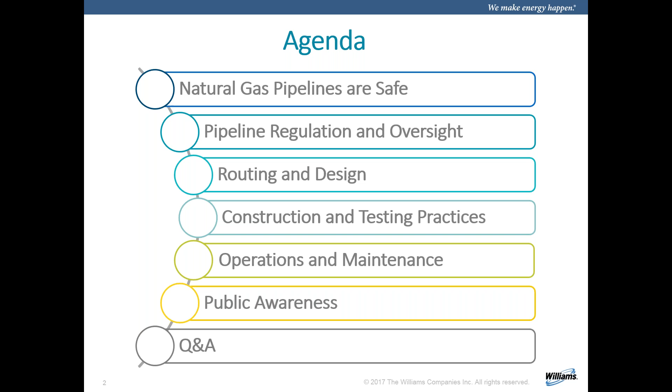Today, I'd like to step us through the entire cycle of gas pipeline management from a pipeline safety perspective. We'll highlight why we know pipelines are safe through some of the regulatory compliance aspects, and then the construction of a pipeline from the routing perspective all the way through the design and construction, and then testing of the pipe, and then as we operate and maintain our pipeline, really highlight the integrity management programs that we implement and execute in compliance with the regulations to ensure that our pipeline integrity program and transportation is safe. And then we'll highlight the public awareness and outreach programs that we as an industry are constantly mindful of and consider an important topic. And then we'll close with some questions and answers.

First of all, I'd like to start off with a statistic from the Interstate Natural Gas Association of America. Northwest Pipeline is a member.

I believe there's 18 members in INGAA. Northwest Pipeline, or Williams Gas Pipeline, is a member of INGAA. And this is a statistic that I thought was really interesting and worth sharing: 99.999997% of all gas moved through interstate pipelines is done safely.

So we should take a lot of confidence in that statistic, and it really shows the credibility and value of our pipeline safety programs. It is considered by INGAA, citing the Department of Transportation, the safest form of energy transportation in the United States.

We as operators of gas pipelines certainly consider safety our first and foremost priority. It is considered every step of the way, through our discussions and maintenance of our pipelines, and through that whole cycle of design and maintenance.

Here at Williams, I'll just highlight the first mission statement we have: we operate safely in everything that we do every day. I believe most employees have that posted on their office walls, so they can constantly be reminded that we need to operate safely in everything that we do.

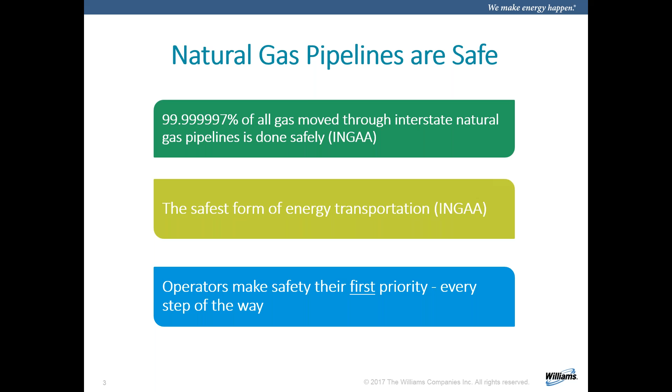Moving on, let's highlight why we believe natural gas pipelines are safe. There really isn't any one single tool or technique that provides all the answers. It's a multifaceted approach, all the way from robust design and construction through our operations and maintenance practices. We are constantly mindful of the need to be safe and constantly questioning the practices we employ.

We obviously want to make sure we meet or exceed all of our pipeline safety regulatory compliance expectations. We'll highlight a bit about what that is and how we get into the Department of Transportation rules. In many cases we do exceed those expectations, and we also try to develop a strong safety culture.

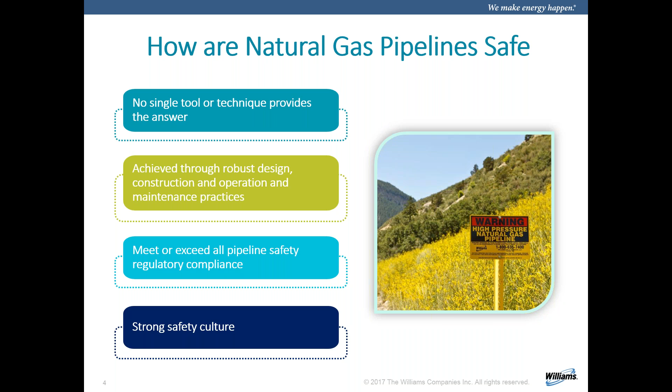Moving on, from a regulation standpoint, we are regulated as an interstate pipeline by the U.S. Department of Transportation through the Pipeline and Hazardous Materials Safety Administration. Northwest Pipeline is interstate, and in our portfolio of assets we also have some intrastate pipelines, which are generally regulated by the state entities themselves.

So that puts in perspective who our regulators are—it could be a federal regulator or a state one, and each issues regulations we're all mindful of. As a regulator, they track and ensure we're in compliance, they conduct audits regularly, and we are obligated to report incidents to them, and they roll up statistics as a nation or for the state as a result of regulations or incidents we communicate to them.

Through regulatory compliance, we're required to maintain effective operations and maintenance manuals that dictate how we operate as a pipeline, what we do, why we do it, and how it should be done. There's also an expectation that we have an operator qualification program, which details how we qualify, certify, and train those who perform actions on our pipeline. They're expected to be well trained and implement things effectively.

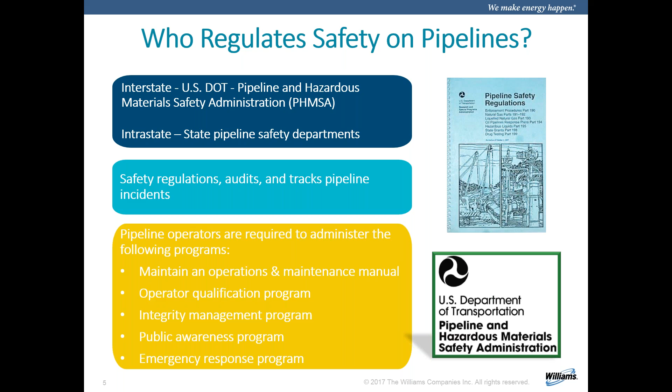So all the way through the life cycle of pipelines, from a pipeline routing perspective, whenever we have a chance to choose or propose where we'd like to route a pipeline, we're always mindful to minimize impacts as much as possible to the environment and to the public.

If possible, we try to stay in the same right-of-way with other operating companies, whether it be a pipeline or electrical utility, just to minimize the impact to the community. We're also mindful of the stability of the pipeline route, avoiding geohazards, side hill slopes and maximizing ridgeline alignments where possible, to make sure the pipeline is in the best possible spot to minimize incidents in the future. We also do a geotechnical analysis that goes with the geohazards approach to ensure it's safe to construct.

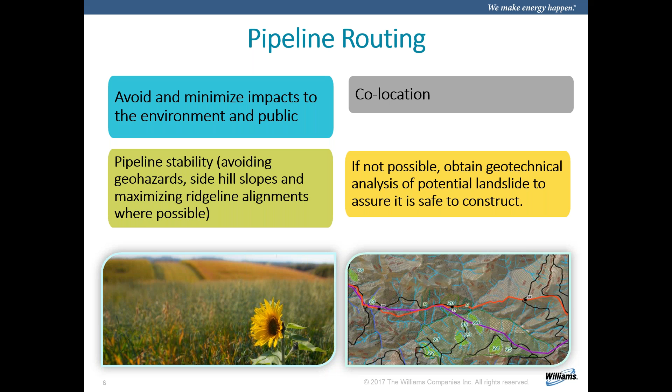Let's move on to the building aspect of the pipeline. We have proven design standards and practices that we as an industry collaborate on. The American Petroleum Institute has standards that we try to abide by, and sometimes these are cited by regulations we need to comply with. These have been tested and improved over time, so we're continually getting better at how we design these pipelines.

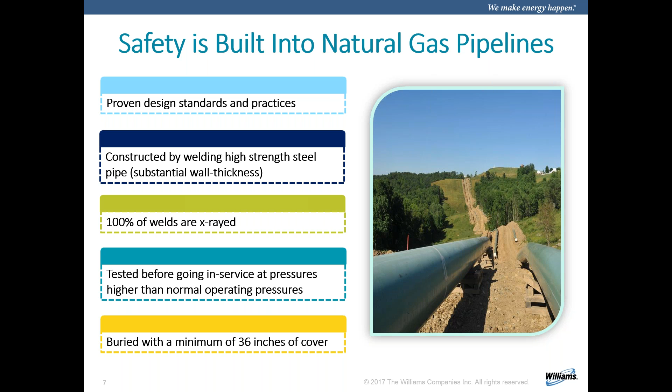A pipeline is constructed of high yield strength pipe with substantial wall thickness to ensure the gas stays in the pipeline. We X-ray 100% of the welds when they're constructed, and before they're placed into service, the pipeline is tested at a pressure higher than normal operating pressures. So we have assurance that if there's any defect, it will be found through a pressure test before the pipeline is placed in service and gas is moved through it. We also want a barrier of cover on top of us, so we try to have 36 inches of cover on top of our pipeline, according to regulation.

One aspect of pipeline design and construction is the term class location. It's a term from the Department of Transportation, a regulatory compliant activity that we do. What this consists of is... well, let me step back.

Class location has a lot to do with how we design our pipeline and the qualification test pressure the pipeline will see before it's placed into service, the operating pressure limit of the pipe, any odorization of the pipeline so others can be mindful of a leak of natural gas. It affects odorization, the spacing of our block valves, and the leak surveys. So class location is an important pipeline safety technical analysis, and without getting too technical, I'll try to walk everyone through what the class location study consists of.

Really, it's a sliding mile. Imagine a ruler that slides along the pipeline, one mile long, counting the homes within that sliding mile as you move it down the pipeline. In this graphic, the first green line moving left to right shows the sliding mile starting at a home near our pipeline, going one mile down the pipeline and counting all the homes within that sliding mile, then moving to the next home and counting again.

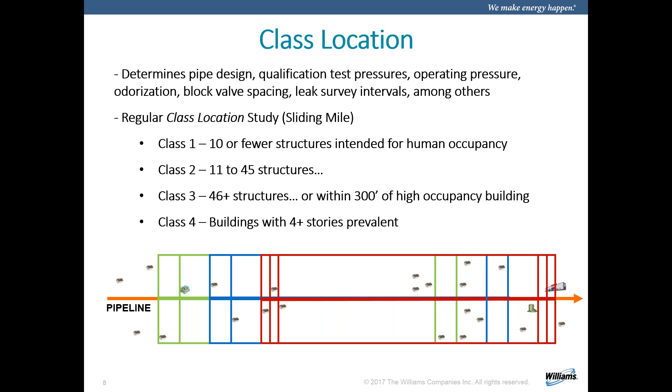If there's a class location built as a class 1 pipeline but more homes are moved in, we capture that growth of population around our pipeline. According to the rule, we might have to rehydrotest a section of pipe because the initial pressure test done at a class 1 area isn't high enough for a class 2 area. So we'd have to either rehydrotest that pipeline to revalidate the maximum allowable operating pressure, or in some cases replace the segment of pipeline because the wall thickness isn't strong enough to withstand the required pressure test. So it's important to understand the term class location when discussing pipeline design.

Let's move on to pipeline qualification testing. When we hydrostatically test a pipe, most testing is done through water, through hydrostatic testing. In a class 1 area, we need to achieve a hydrostatic test of 1.1 times the highest allowable pressure we'll operate the pipeline at. As we move to class 2, that factor increases so we have more confidence in pipeline integrity as we get into a higher occupancy area.

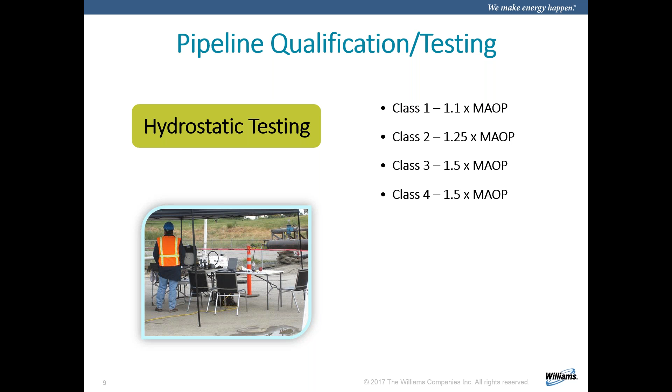Class 3 goes to 1.5, and class 4 sees the same test pressure. But I'll note that class 4 areas are quite rare—you really have to be in a very densely populated area for a class 4. They see the same ratio as class 3, but class 4 has a design factor requiring a higher design factor for pipe. So that's another measure we have for class 4.

Hey Jason, before we move on, we do have a question. I think it's relative to slide number 8. The question asker says: I'm aware contractors have to train to be in compliance with general standards for covered tasks, but also have to be up to date on operator-specific requirements. Can you give examples of some Williams-specific approaches that contractors and employees have to learn?

This is Steve Potts. I'll give a couple quick examples. On the construction side, welders need to be qualified in the welding procedure, and people conducting the hydro test have to be qualified. On the operations side, it would be valve maintenance, right-of-way inspections, and that type of thing—all covered under the OpQual rule.

Great, thank you. Okay, all right, good question.

Okay, I believe I'm on the pipeline coating slide. After the pipeline has been tested—let me back up. Previously, years ago, when pipeline came out of the factory, it just came as pipe without coating on it. The coating is now placed; in most cases, pipe out of the mill comes with coating on it. The whole point of pipeline coating is to form a barrier against corrosion that will prevent or mitigate metal loss leaving the pipe and going to the natural earth.

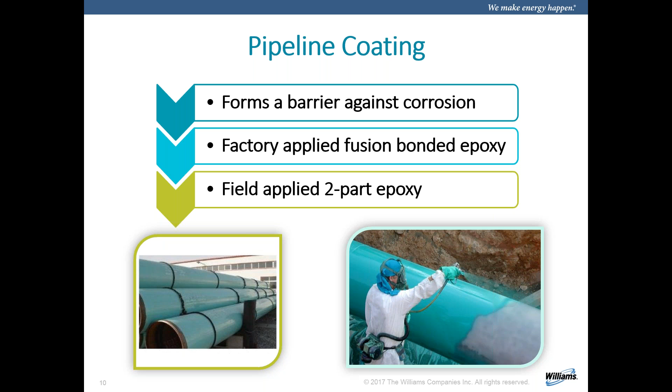We have a couple forms of coating. Most cases now it comes out of the pipe mill already coated through fusion bonded epoxy, a really strong epoxy that prevents corrosion. It's also applied in the field as a two-part epoxy for enhancement. In the lower left corner of that slide, you can see the factory applied coating is already on that pipeline—typically a green coating for the fusion bonded epoxy—and the weld section areas are not coated. Those get coated in the field after welding is done. The photograph on the right shows a gentleman applying a two-part epoxy in the field. Coating is an important factor of pipeline safety—there's no question it prevents corrosion from our pipeline.

So after we have the pipeline in the ground, inspected, and operating, there are a number of things we do as an operating company to maintain the integrity of the pipe and prevent gas from escaping in any way. A large factor is patrolling the right-of-way, putting eyes on it, making sure we don't see anything abnormal. Depending on the class location, we perform more frequent surveys to inspect the pipeline for leaks. Annually, we fly the right-of-way in a plane and assess all the pipe visually.

And another factor is, of course, line markers. We want to make sure that the public is aware of where our pipeline is at, making sure those are maintained and up so the public knows that.

A significant factor is our 24-hour monitoring through our pipeline control center or gas control center. Northwest Pipeline's office here in Salt Lake City monitors from that control room all the gas operations and gas flows through the entire system, through the SCADA system, the supervisory control and data acquisition system. They can see if there's a drop in pressure, and they can immediately take action to maintain safety to the public if there's an incident.

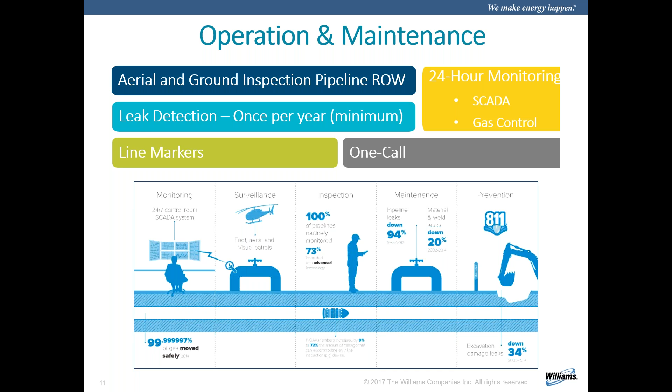To jump into the integrity management program... another question? Yeah, we've got an interesting one here with reference to the Class 1 and Class 2 classifications. If you have an area that is developed from a Class 1 and then becomes a Class 2, do you go back and upgrade those pipes to reflect that change?

That's a great question. Generally speaking, if we install a pipe, we try to hydrostatically test that pipe to enough pressure that if one day enough people move around that pipeline, or if there's an encroachment or density increase, that pipe is already good enough, having been tested to a pressure high enough to be operating at the Class 2 level.

If for whatever reason we did not test the pipe high enough when we installed it during original construction, and we needed a higher test, then absolutely we would go in there and perform another hydrostatic test to achieve the appropriate level. And if the pipe is not designed to achieve that level, then we would replace it with higher thickness, higher grade steel so that we could achieve that pressure.

Does that answer the question? I believe so. If it doesn't, it does. Thank you. Okay, all right, good question. All right, I'm on the integrity management program slide.

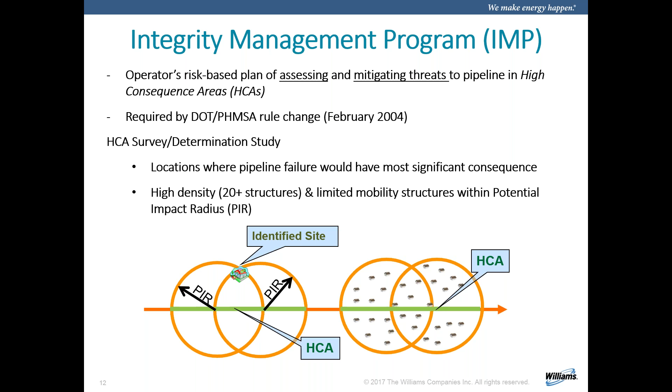That's straight from the code. Then we have an HCA, and as the PIR moves along the pipeline, when that identified site or HCA no longer exists, the HCA is no longer present. So it's important that we maintain surveillance of our pipeline and the occupancy around it. Moving to where we've identified an HCA, the IMP rule, which came out in 2004, required that all HCAs be assessed by December 2012.

And they could have been assessed through three different means, generally: an inline inspection, which I've got some slides later on that show what that consists of, or a pressure test, similar to a hydrostatic test, or a direct assessment. Basically, we're ensuring that the pipeline integrity is solid, and we're constantly, continually evaluating the threats to our pipeline along these HCAs.

The rule required that after it was initially assessed by 2012, every 7 years thereafter, we would have to assess the pipeline according to the threat that we perceive the pipeline might be facing, such as corrosion, cracking, or other defects. Another threat that we face is human error, so excavation damage.

HCAs come into play when we reach out to our public, the general public. We do more extensive outreach in HCAs than in other areas. We also monitor the threat of weather and other earth movements.

Now, I will say that just because a particular segment of pipe isn't considered an HCA on the technical term from the code, that doesn't say that we don't execute on integrity management principles. We'll talk about inline inspection, how much of our pipeline is assessed that is not an HCA through either inline inspection or pressure testing or direct assessment.

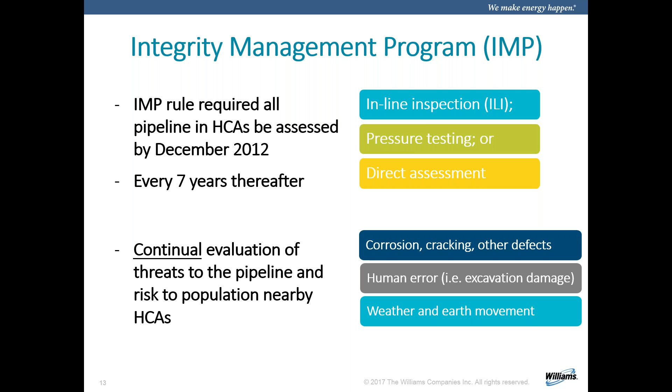So Jason, can you give an example of direct assessment? So this is Steve here again. The rule allows direct assessment. What direct assessment involves is some engineering survey. So where you typically might use direct assessment is on a pipeline that is not piggable, with a lot of tight bends and fittings on it.

It might be a few hundred feet, and it's not practical to run a pig. So the rule allows you to do an engineering assessment to identify what your risks are—external corrosion, internal corrosion, third-party damage, what have you. You identify what your risks are, and then you can conduct some engineering surveys to point you where you want to dig on that pipeline.

So you might do some close interval survey studies on that pipeline and find an area of low potentials—Jason is going to talk about the cathodic protection systems a little closer—but you might find some areas that have lower cathodic protection levels, and that might tell you where to dig, and you go do direct assessment. So you dig up the pipeline and inspect the coating and then the condition of the steel itself. You document it, and that is what is referred to as a direct pipeline assessment.

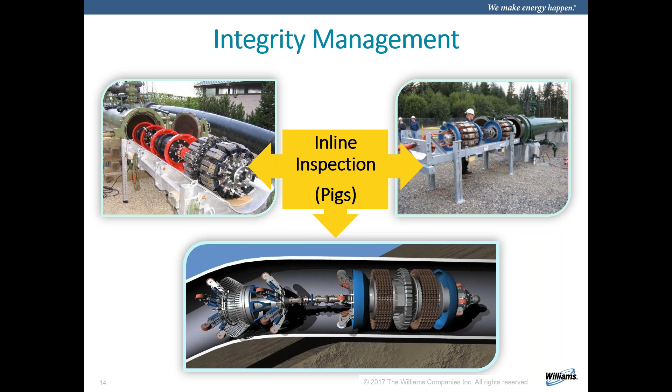But there has been a significant amount of cost, as you can imagine, through the integrity management program. I will move on here to cathodic protection. This is basically mitigating the loss of steel from our pipeline going to the earth, because naturally, if you bury a pipeline in the earth and just let it sit, it's just naturally going to corrode.

So what we try to do is send a low voltage current to the pipeline to minimize that loss. If there is a defect in the coating for whatever reason, we want to make sure that the steel on that pipeline is not corroding into the earth. This technology called cathodic protection allows us to send electrons, not to get too technical, to the pipeline that would prevent the metal loss from the pipeline.

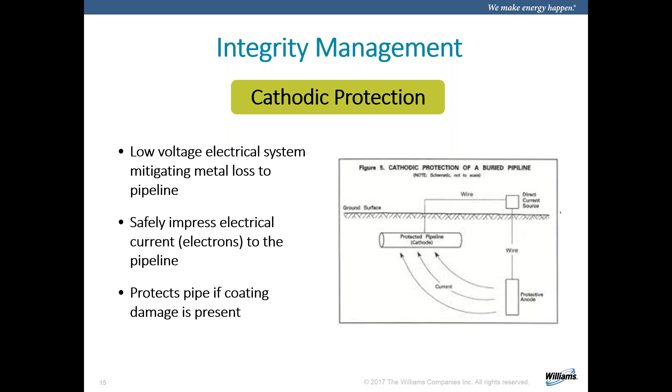Okay, so now let's get into the public awareness program. Certainly a really crucial part of pipeline safety is how we engage with the general public and make sure that they're aware of our pipeline, and how we can all work together to make sure that it's safe and delivering gas to the markets we need it to get to.

First one I'd like to highlight would be our emergency responders. Certainly critical that we engage with them, and most importantly, those who live near our pipeline, to make sure that they know how to keep our pipeline safe without digging into it.

Of course, the 811 Call Before You Dig program. We sponsor activities so that the public is well aware of that. We have a program that specifically targets them so that they are aware of the need to call 811. We reach out to our excavators as well, to make sure they're aware of safe digging practices, etc. Public officials and emergency responders - we want to make sure we're all aware of the pipelines and how we can work together to make them safe.

So what's the message that we try to reach out and engage with them? Well, it depends on the audience, but really we want them to know the status of our pipeline. So if there's a particular threat, such as excavation going on that the general public might feel is not safe, we want them to know they can call the 24/7 pipeline control room, and we can immediately dispatch personnel to the site to assess the situation.

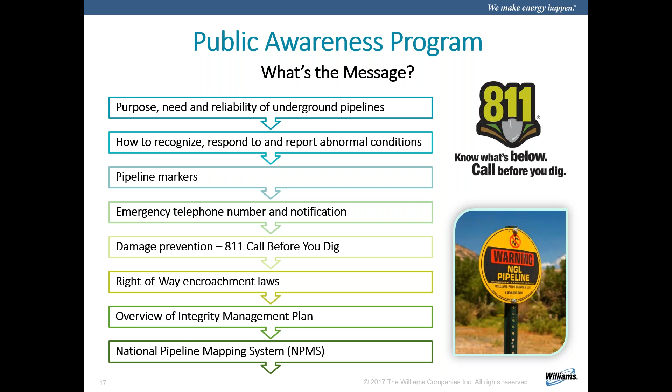Okay, excavation damage - that's really a key threat to us. There's a statistic we got from the Department of Transportation. Secretary Foxx said in 2015 that excavation damage is a leading cause of serious pipeline incidents, causing death, injuries, and property damage. So we really focus on our excavation outreach.

Unfortunately, between 1988 and 2014 there were 1,815 pipeline incidents. That's unfortunate - 193 deaths and a significant amount of injuries and money lost there.

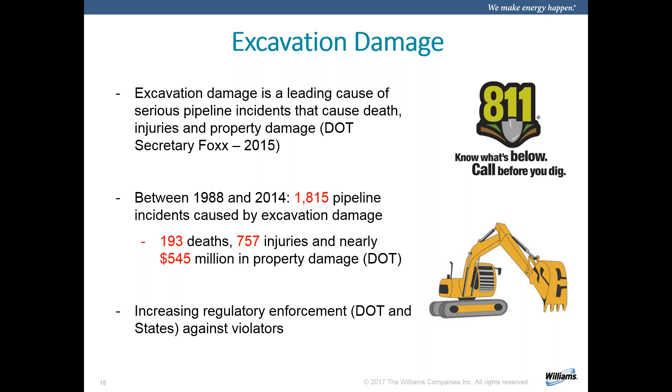So certainly an important thing that we want to make sure that we are communicating well. As far as regulatory enforcement, I know the state and federal agencies are increasing their enforcement on those that do not follow the rules or aren't obeying the law, because you can imagine the significant risk that they're putting themselves at and the general public if they do not follow the proper practices and laws.

Finally, I'll hit on emergency response and planning. Obviously, we have strong engagement with our emergency response community. We offer site-specific awareness for a particular fire district that is in the area. We want them to know about what we would need to be mindful of in the event that something were to go wrong, what kind of hazardous materials we have on site, and what the priorities would be if there was an incident, and how we can engage with them.

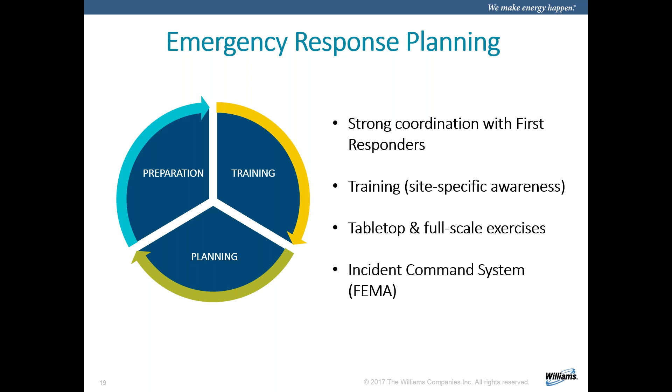We exercise with them often. We do tabletops and full-scale exercises. One of the key things we found success with is the use of the incident command system through the FEMA practices of managing an incident. If an incident were to occur, we need to coordinate best so that we know who's on first, so to speak, who's doing what, and how we can coordinate together as a team. It's certainly an important thing.

Highlight the new Department of Transportation rule that's pending. There is a significant mega rule, so to speak, that has been proposed by the Department of Transportation. It's gone through an advance notice of proposed rulemaking to increase the regulations on our pipeline. It really was spurred by the unfortunate event of the San Bruno failure in 2010 near San Francisco. The notice of proposed rulemaking came out in 2016, and the final rule is yet to be published, but we don't expect it this year.

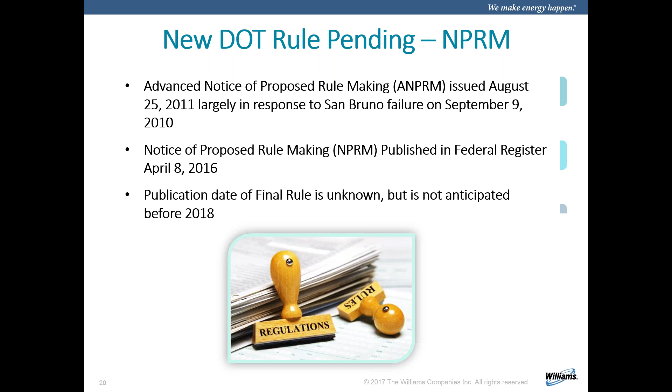We certainly don't expect it before January 2018, but we do have strong collaboration with industry and government agencies on what necessary measures make sense as far as a final rule goes. I'll highlight a couple of things they're proposing to increase as far as regulation. For a Class 1 area, instead of being a 1.1 hydro test rule factor, it would raise that to 1.25.

There's an expansion of the integrity management program to increase the assessment intervals in the risk model and the data integration that's expected from the integrity management program.

If you remember the high consequence areas, or HCAs, they're proposing a moderate consequence area, or MCA, which the operating company would be expected to run. An MCA would be a less risky area, triggered instead by 5 homes in the PIR rather than 20. Or if we have an occupied site or a major roadway there, that would also trigger an MCA. MCAs would come with stricter inline inspection criteria and other requirements.

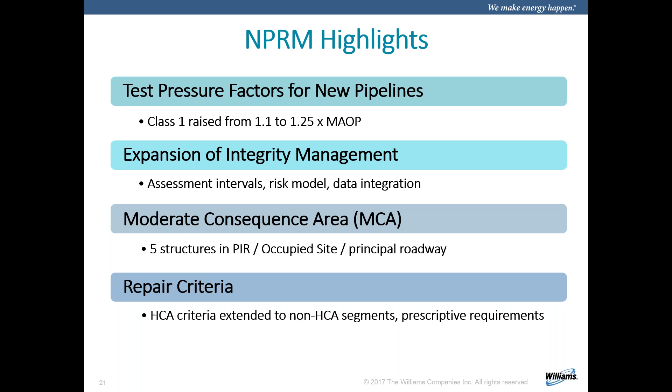Repair criteria would be expanded to non-HCA segments—what are currently non-HCA segments now. Based on our integrity management assessments, we would repair those at a more frequent rate than what we're currently doing now.

And records—that's an important thing, making sure that we have records that can document what type of pipe we have in the ground, and the hydrostatic testing records it's gone through. That's an important thing industry will be expected to comply with, along with verification of our operating pressures, or MAOPs.

There would be elimination of the grandfather clause, which, going back in time, has said that if we can document we've been operating a pipeline at a particular pressure before these more stringent hydrostatic test records came out, then we could basically be grandfathered with that pressure. That would no longer be in play with the rule. We would have to document that in HCAs, MCAs, or Class 3 or 4 areas.

And then management of change, expanding the scope of making sure that we're all aware of all the significant operating changes that occur on our pipeline.

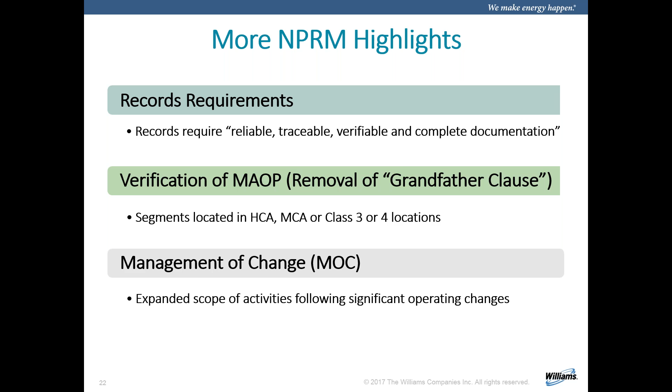Well, that's the final slide. Just to summarize, this is a multifaceted approach, all the way from survey to construction and inspection, to operations and maintenance procedures and plans, integrity management, and continually monitoring the integrity of our pipeline. So with that, Connor, I will open it up if there's any questions that people have.

Yes, we did just get one question in here. Regarding PHMSA's proposed gas transmission and gathering line rule, what do you guys make of the rule as proposed, and have you been following PHMSA's Technical Advisory Committee's recommendations on changes to the regulation? There's a second part to the question: do you see the Trump administration's policies having an effect on pipeline safety rule development?

Okay, great. Yes, we are collaborating with the GPAC through the technical advisory committees. It fails me the full acronym name, but basically the GPAC is a group of folks that collaborate on the rules, making sure that they're effective and that we can get agreement on the rules.

Williams is involved with INGAA and the GPAC on submitting a comment back to PHMSA, and I'm not sure exactly how far we go into our technical compliance with what the GPAC is recommending now. I know that we certainly will make changes if we need to comply with the rule. So I hope that addresses the first question.